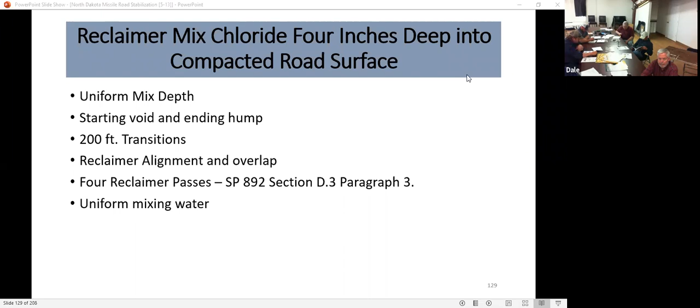Doesn't want to. Oh, I guess I got to click. There we go. There you go. I'm sorry. Can you hear me all right, Dale? Yep, loud and clear, looks okay.

Good, very good. Well, I appreciate the thoughts and comments there. And if there's something that I go over here that you question at all, or have any questions about, I'd really appreciate the question. I know I'm going through this pretty fast, but again, feel free to interrupt. That's where we really get down to the nitty gritty.

This next section is on reclaimer mixing 4 inches deep into the compacted road surface. If I failed to mention it, I'll mention it now: it's 4 inches compacted thickness, we don't specify loose thickness, it's compacted. So when we run a reclaimer through that, 4 inches fluffs up to maybe 5.5, perhaps 6, depending on moisture content. So what we're concerned about is uniform mixing depth.

I want to talk about the starting void and the ending hump, which may sound kind of weird, but I'm sure reclaimer operators can relate to this, and the 200-foot transitions in the specs. This reclaimer alignment and overlap, we already kind of talked about that with chloride spreading. And the number of reclaimer passes, we have to make 2 passes on each side of the road. The uniform mixing water is a critical issue here.

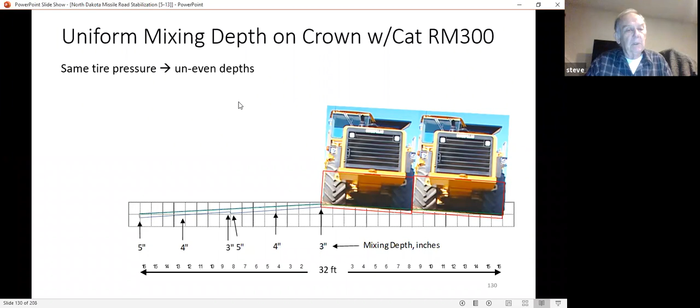I'm going to suggest one way: vary tire pressure. This lean is not very critical when you're going down, say 10 or 12 inches in a soil stabilization application. But where we're talking about going down 4 inches, it can amount to 1 to 2 inches, again depending on tire pressure. So one thing to do is definitely check your tire pressures to make sure they're uniform, and then you may want to consider adjusting the front tire pressure, and maybe doing this on a concrete floor.

The 3.5-inch blocks simulate the 4% crown, so you put blocks under the up-crown side to get the lean into the machine, and then you measure what the actual crown or slope is on the front bumper of these Cat reclaimers. It's pretty convenient to do that with a Cat machine, and you'll probably see that it's over 4%. So you need to adjust your tire pressure so that when you're on a 4% slope, the front bumper or frame is at 4.5%.

So anyway, this is just one way to try and counteract this issue with crown, grinding on a crown on thin lifts. What it means, though, is that every time you switch to the other lane, you have to turn your reclaimer around so that same wheel is on the up-crown side.

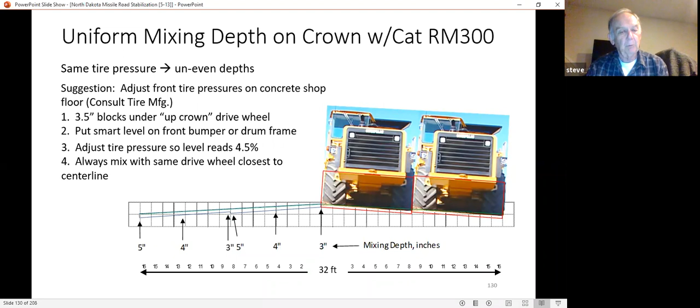When we look at the voids and the hump created during regular stabilization, where you're going down say 10 inches or something, when you lower your drum into the ground, you build up a pretty big berm in front of the drum, and material starts coming over the top of the drum before you move forward.

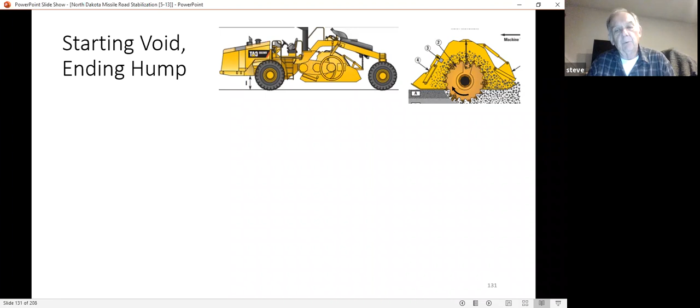When we do that with gravel, a 4-inch layer of gravel, the first thing you notice is that you're throwing rocks out the front of the machine unless your front door is closed, which I'd suggest closing just to retain material. As you start moving forward, you don't get a berm until you go down the road maybe 20 or 30 feet, and then after you get that accumulation of gravel in front of the drum, it starts coming over the top and falling behind the drum where it should be.

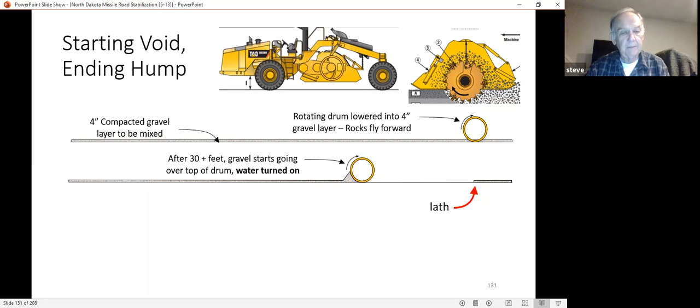Also, wherever you start, I suggest putting in a lath or some kind of mark—maybe a cone, a traffic cone, a candle could be another approach—to make sure you know where you started and stopped. After the blade gets out there and starts moving stuff around, it's kind of tough to tell sometimes. But you end up with this starting void, and when you get to the end of a run, you also have a hump.

Of course, when your forward motion stops, you shut your water off, you raise the drum out of the ground, and then you back up. Normally people will spread this berm out with their front door, going backwards. But you have this void at the beginning, and the beginning and ending here might be 1,000 feet away from each other, so it's not very practical to try and get that material back down to this point. I have a solution for that you might want to consider.

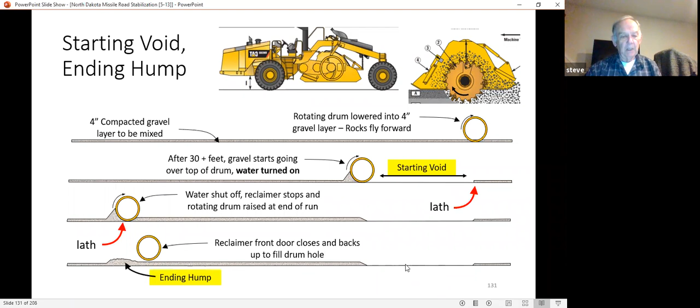So anyway, you might want to smooth this hump out, but that doesn't really solve the void problem down here. One way to deal with this, I'll try to illustrate in this schematic: we've spread chloride down this side, the first lane, and the chloride truck either turns around or covers the second lane. Then when we come along with our reclaimer, we have a void down in here, and he backs up and starts here again.

You could turn the reclaimer around here and go this way, and that way you'd have a void and a hump right next to each other, so the blade operator could have a chance to fix that void.

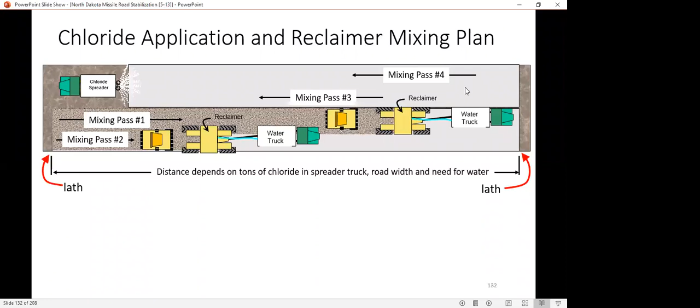However, another way to do that is, like in the diagram, the reclaimer starts on this side of the road, at this end, and they're going in the same direction. When you get on the other lane, you turn around and go that way, so we end up with a hump and a void problem opposite each other, so the blade operator can fill in the void with a hump. So that's one way to do it, I guess.

I show a roller behind this reclaimer for a good reason, and that roller, compacting that material, does a number of things. One of the things it does is start the curing process, the chloride curing process, because it mashes all that material together and gets that chloride to spread out better within the compacted mass, so to speak. It also gives the blade operator more of a solid platform to blade from, as opposed to trying to blade a bunch of loose material.

That one roller's compaction is lost later by the fact that we have to end up blading all this over again, reprocessing this material. But I think it is important to have it there to start the curing process.

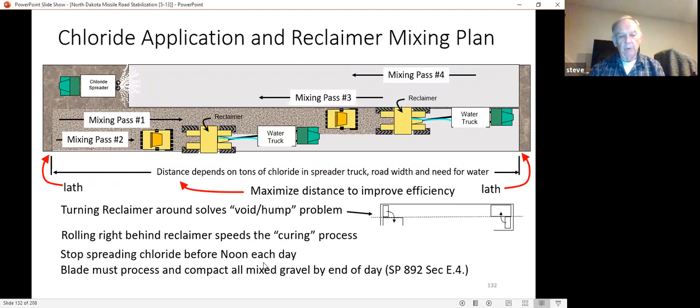One of the things that's important here, and Tom Oxford will be on top of this, is to stop spreading chloride too late in the day. There's a lot of work to do after spreading that chloride, so you may want to stagger your work team or whatever.

With respect to transitions at the beginning and ending of the treatment, the drawings show a 200-foot transition, which I understand what this is for, but I would suggest maybe making this 50 feet in the future.

There's a question as to how you're going to mill and blade this 200-foot section. You can't mill this thin out here. So what I suggest you do is take this material in the first 100 feet of this transition and basically move it ahead and start your milling here.

And this is where your lath would go in the ground, or your candle. Then after you get done in the final blading, you basically move all this mixed material back into this other 100 feet.

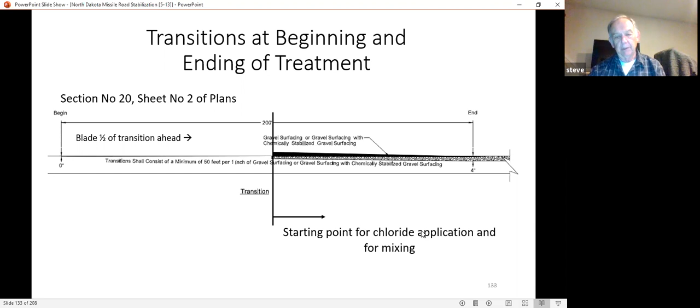So this is a starting point for your chloride application and for your mixing. Coming up with a chloride spread mix plan is kind of important based on how much chloride you have in each spreader truck and how much water you have in your water truck, and what application rate or how much water you think you're going to have to add during mixing.

The spreader truck or the water truck could limit that or be the controlling factor on how far you go. Based on 15 tons, 30 feet wide, with the spreader, you'd go 1,154 feet. With a water truck with 3,000 gallons, if you were adding 1% moisture, you'd go 1,800 feet. So in this case, your chloride spreader truck controls how far you go.

This shows the chloride that's been spread, the water truck that's being pushed by, in this case, a blade with a rotary mixer on the rotary drum on the front on the moldboard, and then followed by rollers. And of course, all this is going to be picked up again, but getting that compaction will speed up the process of curing.

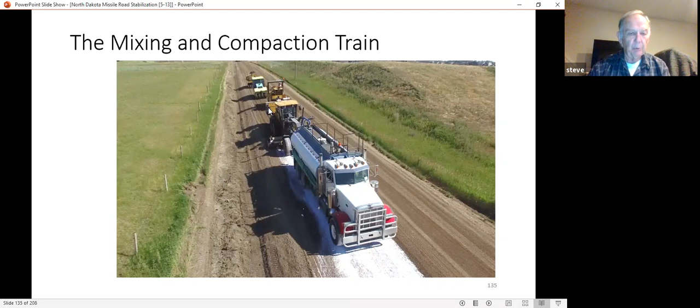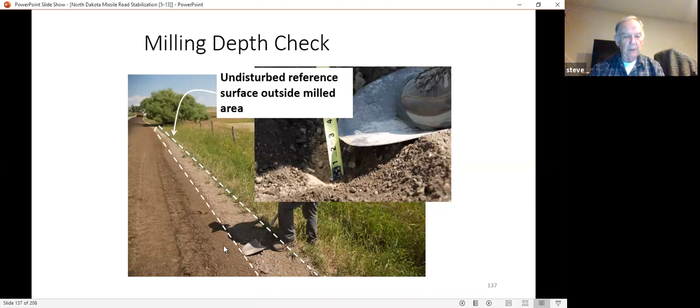With respect to milling depth checks, a good way to do that is at the edge along the shoulder, and assuming you have a pretty good shoulder out here, you basically remove any loose material right on the surface and then dig a hole and measure that depth. Here we're looking for 3 inches, and here again we're at 2 inches, and we have this 2-inch depth, and again here's our compacted depth that we're trying to determine whether or not we met that depth requirement.

Here we're looking at moisture content indicators. You can do this by picking the gravel up in your hand and squeezing it. You should see some moisture on your fingers and palm, and the cast that you make should stick together. If it falls apart, you're too low. If you're squeezing a lot of mud out on your fingers and the palm of your hand, you're too high.

You can also look at the tires on your reclaimer. It's a little tough to do on a Cat reclaimer for the operator to see them. This isn't a really good example - this tire should have more fines sticking to it. I think I have a better slide later where we look at the front tire on this type of machine, and it's clean with little material sticking to it.

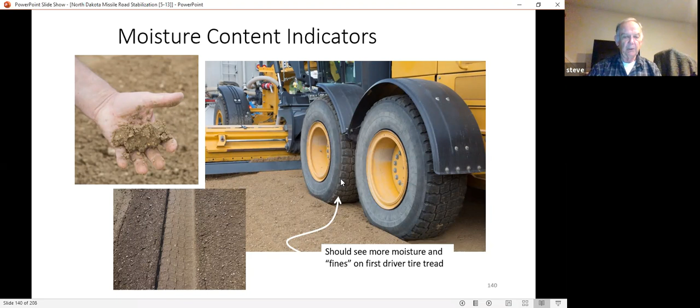We're adding water in the drum here, so we've got higher moisture content, and you can see that on the wheels. Here's a case where the reclaimer operator, starting out, needed to ramp up his water as he got into material. That's difficult to do - you can't just turn on the water and expect it to be uniform, because you've got different amounts of material coming over the top of the drum. So we got a wet spot here, a dry spot where he totally turned off his water, then another wet spot, and this blade is waiting because as soon as the reclaimer gets matched up with the first run, he's going to blade these wet spots out.

We've got quite a bit of material sticking to the reclaimer tires. The moisture content and the mix look very uniform. We do have some overlap, higher moisture content at centerline, and so the blade operator is going to have to solve that problem. Otherwise we'll have problems probably getting compaction here because it'll be too wet.

There's a good reason why in the specifications they call for being within 2% of the low side of optimum. So if our optimum moisture is 6%, we have to be within 4 and 6, and we don't want to go over 6. The reason for that is to eliminate or reduce the amount of blending we need to do with the blade, and hopefully meet compaction without exceeding optimum moisture.

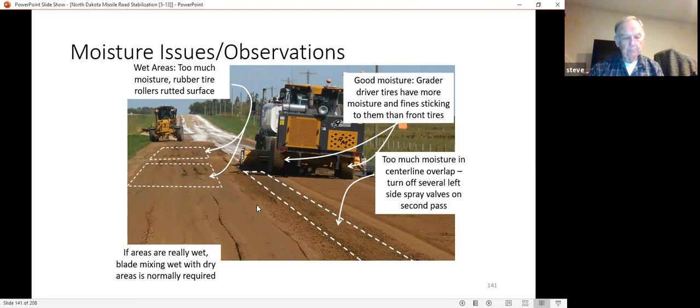Again, this estimating process where we dig or put our hand into the mixed material and squeeze it - this material's too dry, the clump is starting to fall apart. In this case, we're close to optimum moisture - there's no sheen on the aggregate, and the material sticks together. In this case, we're squeezing too much moisture out of the material, and we see an excess amount of fines and moisture on our palm and fingers.

Here's a better picture of the tire comparison, where your back tires show quite a bit of moisture on them, and your front tire doesn't. Seeing the back tires on a Cat reclaimer is pretty tough from the operator's compartment, so that's where a ground man comes in. That's pretty important - we already talked about this streaking and this problem.

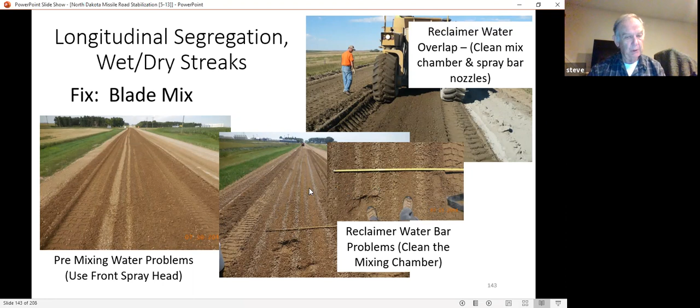You can also have segregation problems that exist because of moisture. So when you see these kinds of problems, you need to figure out what's going on. The only way - you can't rely on the reclaimer operator to see these. That's not realistic. There has to be somebody on the ground doing that.

With respect to the reclaimer operation, the alignment - he basically has to follow whatever spread of the chloride. His depth control is, of course, important, and you don't want to get into the subgrade. Hopefully we've got enough rock out there - sounds like we do. Moisture content is a big thing, and that will influence what happens during shaping and compaction. So that's very critical.

Now we'll talk about blade processing, the gravel and chloride. The objectives of this are to improve the chloride mixture and moisture content, make it uniform, and help speed up curing.

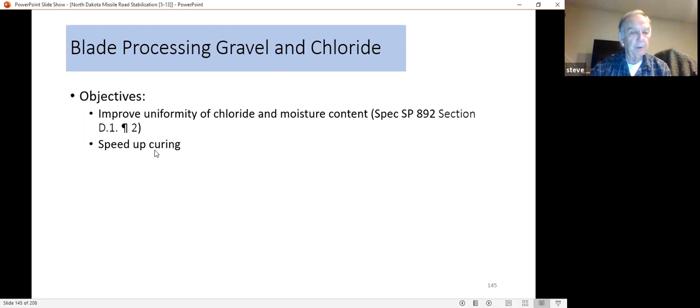One of the things is we have these pretty wide roads. Here I show one at 16 feet either side, so it's 32 feet wide, and we have a 14M with a 14-foot moldboard. You can stack material higher than 27 inches, but it takes up quite a bit of space. When you first move this material from this side to this side, part of it really hasn't been touched, so you need to make sure you get everything mixed - maybe by making a run down each side, then moving it all over to one side and spreading it. Various techniques for that, obviously. But we need to process full depth and width, and that's what it says in the specifications.

The higher the moisture content is, the more this is going to fluff, but the higher it'll stack too. So here are some of the concerns about doing this.

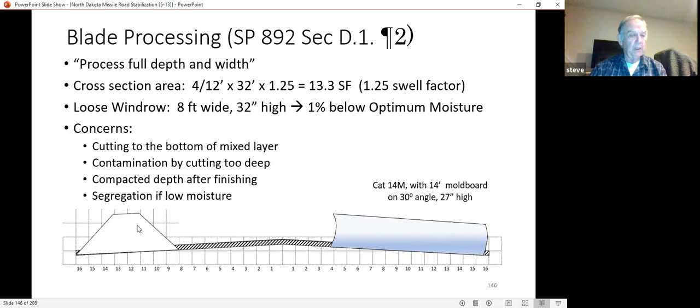But the segregation is key. If you can't get this to a uniform moisture content and gradation, you need to keep mixing, and that's important.

This is what the specifications talk about for cross slope. Again, we need a tolerance on this, and I would suggest making this 4 to 4.5%, and that'll give a little bit of leeway, because you don't really know how much that material is going to knock down after you build it at a certain percentage. So I'd suggest building it at 4.5%, and you'll just be over 4% after everything's cured out.

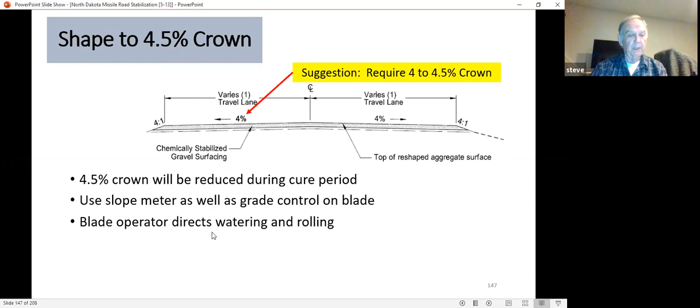Again, using a slope meter and a blade can be real helpful. The blade operator, of course, is one that directs watering and rolling. He's got to make it look right and come out right. These two operations are key to that, so he needs to control those.

Another thing that's important is if you have, like, a 1,000-foot run, and then another 1,000-foot run, you may want to wait until you get a couple 1,000-foot done so you can blade all this out and make it come together with the proper crown and compaction. The longer the run is, the easier it is for the blade operator to make this look good.

And then compaction with the rubber rollers. Of course, you roll from the low side of the shoulder to the center, and should have a consistent pattern, but it's not near as important with gravel as it is with pavement. The big thing with gravel is you can't over roll it, so more rolling is better. I wouldn't shut down rollers unless you had to for some good reason.

The other thing to keep in mind is that increased speed reduces compactive effort. Again, if you're in doubt of that, put a nuclear gauge out there and run some tests after running roller speeds at like 6 miles an hour, then do it at 4, and you'll find you get a lot better compaction out of 4 miles an hour.

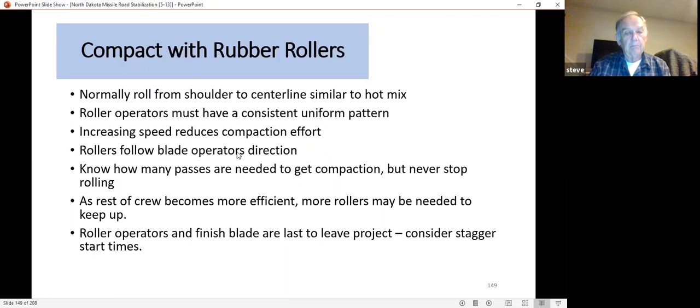The rollers follow the blade operator's direction, and never stop rolling. Again, this just shows rolling the shoulder, then the center line, and keeping these pretty close. Generally in specifications, they specify 3 to 5 miles an hour for compaction rolling.

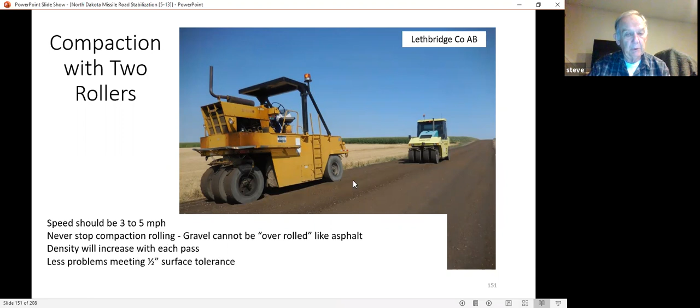This just shows a couple heavy rollers. You will get increases in density with each pass, and you'll also get increases with traffic after you open it to traffic. But the tighter you get this initially, the better chance you're going to have meeting the half-inch and 10-foot tolerance surface tolerance.

I want to talk about optimum moisture for a minute. Optimum moisture is the best moisture for compacting material, meaning it takes the least compactive effort to reach density. During the first roller pass, you may get 90% density. Second roller pass, I'm sure you get 95% with the chloride-treated gravel, depending on roller speed and all that, but normally that's the case.

As you do additional passes, you get less and less compaction, gaining less each time. If you were to roll below optimum, you may never achieve 95% compaction, and it depends on how far below optimum you are. At 2% below optimum, it's going to take quite a few passes to get there. So I suggest you get within 1% of optimum, but that's kind of a close call.

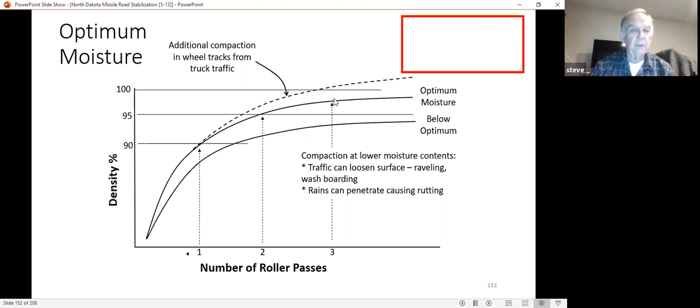What you also find is that after you get done compacting, you will get additional compaction from traffic, and how much depends on a lot of different variables. That additional traffic will not only compact what you did, but it'll also make your surface tolerance probably worse. So that's something you need to consider, just how long you're going to wait after you do this compaction before you accept the surface.

Gravel roads are not pavement. They're not going to stay in the same spot forever, and so there is that problem with acceptance of that surface tolerance.

This is one of the reasons why you want to try and exceed 100% density, and you can do that with heavy pneumatic rollers. That gives you a better chance of meeting the 1/2-inch surface tolerance and not having to worry about what traffic does to that surface.

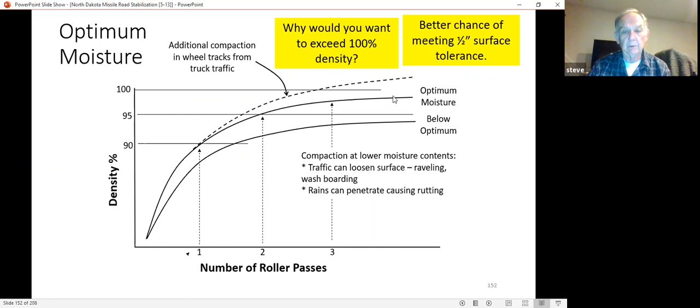Finish blading, you're just trying to get the roller marks out, and you need to carry enough material on your moldboard to do that, but I wouldn't get very aggressive at cutting into it, because you're basically reducing the density and having to come back and roll more material. The finish rolling is very easy to get that back, because you've got a good platform here that's been compacted well.

Transitions between runs: you have to get into the last 50 to 100 feet to make a decent transition. So you do have to go back into what you finished blading on the previous pass, and maybe using your articulation to help get that center line compacted well is good.

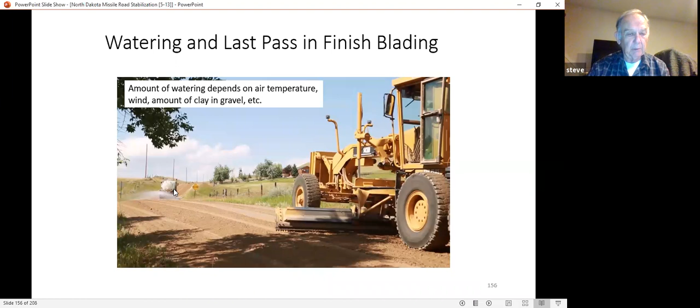Later, when you come back and do your finish blading, some of it might be dried back enough that you want to put some water down, and that can help you avoid segregation if you're using carbide pick blades, and also make that material compact well after your final passes. What you're looking for is the crown, and after your final compaction, you're also looking for percent compaction, 95% compaction.

I want to talk about building a road crust, which is not in the contract or the specifications, but it's a good way to try and reinforce the surface that you build with chlorides, at least with gravels that contain some clay. Now, the sandy aggregate we have in place, we're stabilizing.

You may not be able to do this, but I think it'd be worth a try. Most counties do this as a sort of traditional practice, at least where they have clay in their gravel. There are some benefits during construction: it reduces the amount of raveling or float you get off the finished surface after it's open to traffic, and it makes meeting this 1/2-inch in 10-foot surface tolerance easier. But again, the gravel should contain some clay.

It works best in hot weather because you get dry back pretty quick. What you're doing is basically a light watering on compacted gravel, so this light watering doesn't cause rutting in the gravel. It allows you to pump some fines for a road crust with rollers or water trucks or whatever, and the surface normally dries out and sets up overnight.

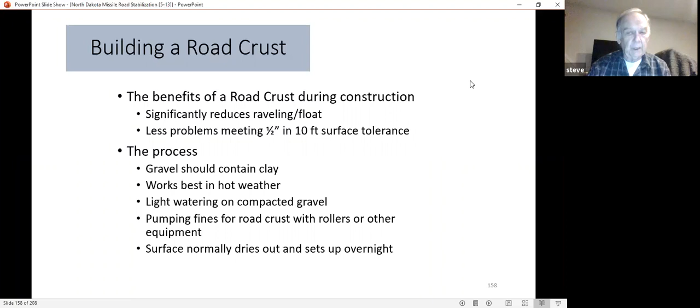This clay crust is kind of what we're talking about back when I went through this slide. I think that's an important part. It's one thing that's kind of difficult to specify in specifications, but I think it's quite doable in construction if you have some clay in your gravel.

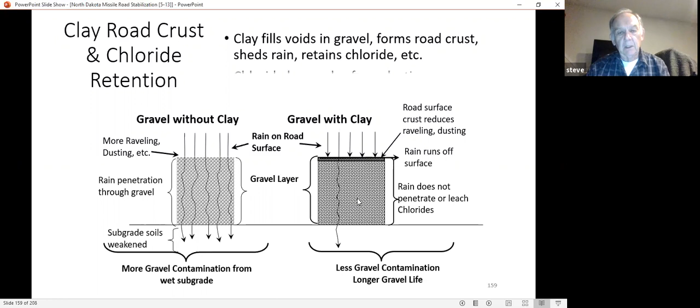10-mile-an-hour signs put out for traffic will reduce the amount of pickup on vehicles that you get, so that's something to remember. What we're trying to do here is just get maybe a 1/4 inch of this material on paste on the surface. Sometimes it's not even that thick, it just depends on the gravel you're working with and the moisture content.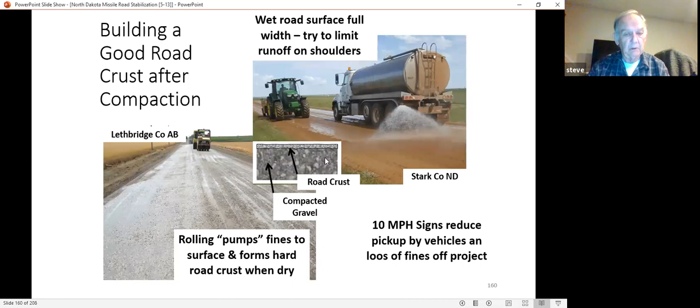Here we've got a little excess moisture coming off the road surface, and you do get these little sort of wheel marks. They're not depressions, but that all goes away by the next morning.

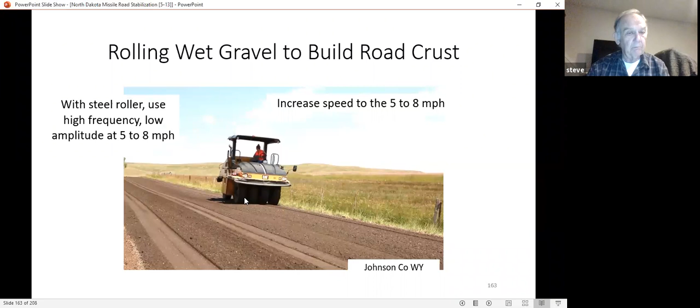Here we are putting down a light application of water, and we're doing the same thing with a self-propelled pneumatic. You want to use high frequency, low amplitude, and fairly fast speeds there. You can do this very easily with steel, with the vibration.

In this case, we have some segregation in our gravel. Just looking at the picture it's hard to tell, but when you get out there it's somewhat obvious. You say, well, I bet that part of the road's going to ravel, and sure enough that's what happens. Most of the water has gone down into this area because there's more coarse material there, and they had pretty bad segregation problems on this particular road.

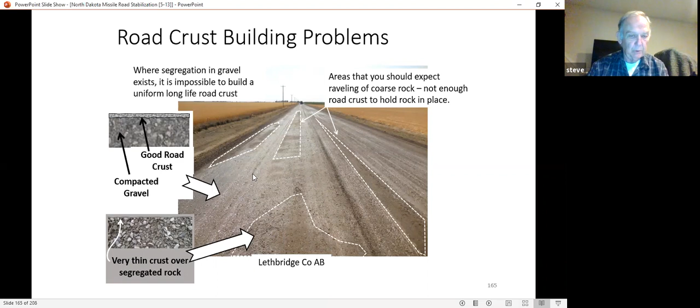Again, you're just looking for a thin road crust over the surface, and in this case we may not have enough to actually make a decent road crust. But in this area we pumped quite a bit of fines to the surface, and that picture I showed at the beginning is a road crust developed by those practices, so it holds up pretty well.

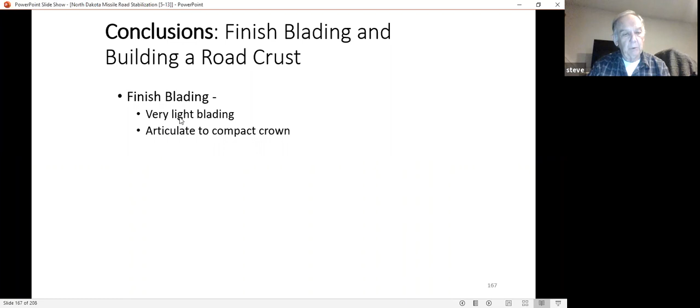Again, for finished blading, we do light blading and maybe articulate to compact. For building a road crust, it's light watering, and then the rubber roller at 5 to 8 miles an hour, or the steel vibratory too, is a real good approach.

You can also use the steel vibratory to try and iron out some of the ruts you might get, to meet the 1/2 inch and 10-foot surface tolerance. You can use this road crust practice with a vibratory roller to try and solve some of the problems you have with that surface tolerance.

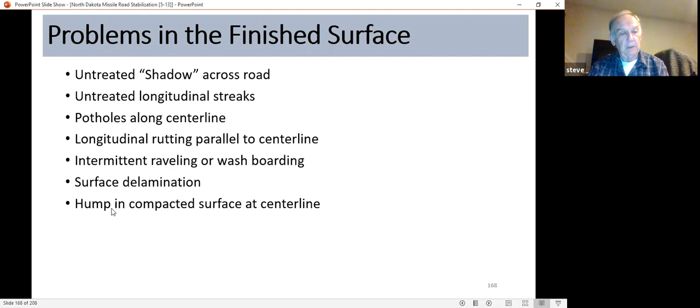Let's talk about problems in the finished surface briefly. One is a shadow across the road, longitudinal streaks, potholes along center line, longitudinal rutting, intermittent raveling, surface delamination, which we've already talked about, and a hump at center line.

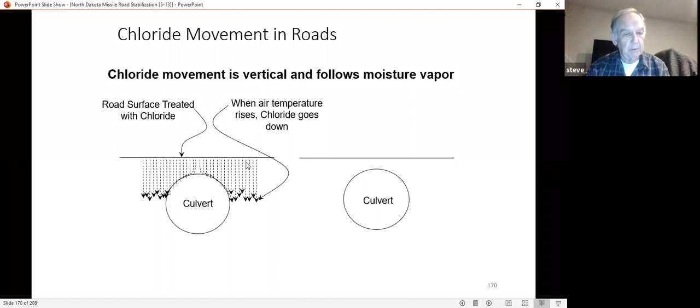The cause—I've listed some causes and fix options here. What's going on is that when you treat the road initially, you have your chloride treated layer up here, and when the air temperature rises, like in the afternoon, the chloride goes down, and in the evening it comes back up. The problem is it's not coming all the way back up, so what we end up with is an area over the culvert where the chloride has gone down, then comes up, then goes down, then comes up. So there's an area over the culvert that doesn't have any treatment.

It was treated initially, and there isn't any way for the contractor to really solve this type of problem. If you put more chloride in there, it's going to do the same thing over again. So there's no remedy that I know of to solve this, unless you have gravel with a higher clay content that reduces the amount of chloride up and down movement.

Untreated longitudinal streaks—I list some causes here, like uneven watering, inadequate blade processing after reclaimer mixing, or no overlap or skip between reclaimer runs. Most of the time, these kinds of problems are going to be solved by good blade processing after reclaimer mixing. So you don't want to skimp on doing that, because that could come back and cause you some problems.

Various types of changes maybe to improve the water truck, and maybe alignment berms or something.

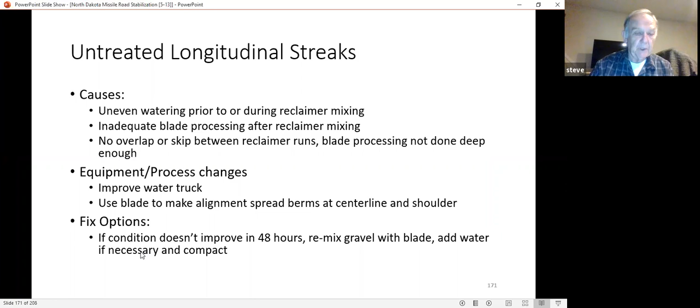If this doesn't improve after looking at it for 48 hours, and sometimes it can, then you need to remix the gravel, reblade, add water, and then recompact, which is intensive.

This is a hard problem to solve. If you end up with potholes, you're not going to have potholes right after construction, but down the road after you get some rains and so on, you may get potholes.

If you do have potholes like this, I'd encourage you to measure the crown that you actually have, because most of the time it'll be under 4%.

One of the causes of this can be the rollers actually during construction. They can flatten crown too, but most of the time it's truck traffic on that crown.

One of the approaches to help this is to go to a higher crown and monitor rolling operations, and maybe change your crown building practices and so on.

Longitudinal rutting can be caused by these benches in the different thicknesses in the treated layer. Pneumatic rollers kind of take care of a lot of this, but that underlying shelf often can come back and haunt you later. So you can get those ruts develop, and you have trouble meeting this half-inch and 10-foot surface tolerance.

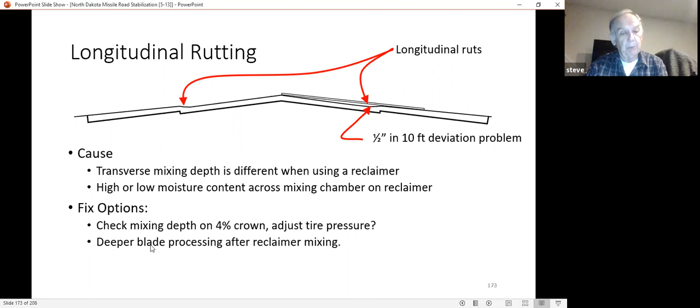We already talked about checking the mixing depth and adjusting tire pressure, and maybe our blade processing didn't go as deep as it should, perhaps.

If we have intermittent raveling or washboarding, that's almost always caused by segregation. Low gravel moisture content when it's placed will cause rock to separate. And if you allow traffic over it before it's compacted, even water truck application with an uneven spray pattern is another thing that can be a problem.

Increasing moisture in the gravel will help reduce segregation. That's the biggest, or the most convenient way to address segregation issues, and maybe better processing with the blade from one side to the other until segregation doesn't exist.

We already talked about this surface delamination issue here.

Sometimes we get a hump in the compacted gravel at center line, and that could be because our moisture content in our gravel is a bit too high, and during the curing process, it's moving too much. You can see this on curves a lot of times, whereas this would be the inside of the curve. This would be the outside, where the traffic is moving material in that direction.

We could have just too much material in one lane during finished blading, and that's why it's so difficult to finish blade one side of the road and then a day later come back and finish blade the other side. You want to try and wrap up both sides of the road and finish blading in the same day.

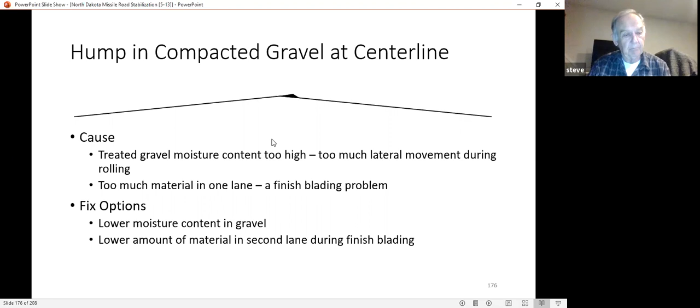So maybe some conclusions from this: thinking back the last couple hours, we talked about developing a work plan and being prepared to modify the plan, of course, and plan around the weather. I think we probably have enough material for 4.5% crown, but during the break, Mark was talking about maybe checking that out to be sure, which I think is a good idea.

If you have segregation issues, it's probably water, and deal with that early. I'd get close to optimum, but be aware that when you go over, you're going to have some problems. And I like to use a blade to mark center line and shoulder, but that's just my thing, I guess.

And cleaning out the reclaimer, check out the reclaimer and mix depth and so on. Reprocess mix depth uniformly, make sure there's a good job. That in itself will help you meet that surface tolerance and compaction.

And I'd say never stop rolling. You will see some sort of a crown reduction during curing. I'm not sure how much, but 0.5% is probably realistic. And the steel wheel can help you meet that surface tolerance.

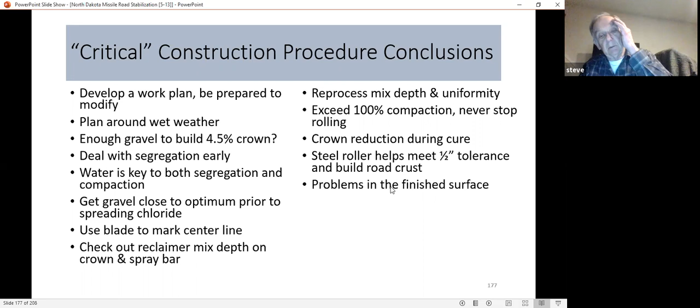And we talked about finishes in the road surface. So the last two modules will take maybe an hour, but I'm hoping a little bit less. But I guess it's time for a break. So I'll stop share here, I guess.

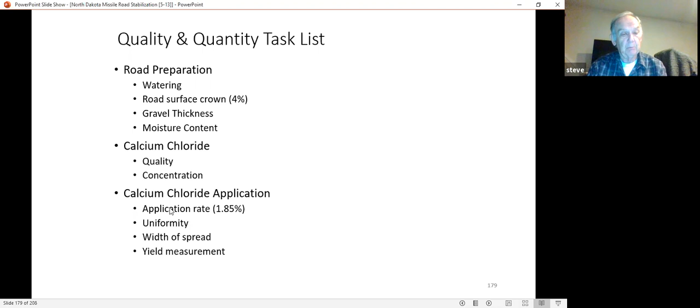I've never had any problems with it at all. The calcium chloride application rate with that 1.85%, we talked about these different processes. And with mixing, 3.5 to 4 inches. The width, of course, is kind of variable because the existing roads are variable. Getting a uniform gradation of moisture is very important, and the optimum moisture within 0 to 2% below optimum. Then compaction and shaping, we have that moisture content, percent compaction, the crown, and the surface tolerance.

So these are kind of all the tasks that are outlined in the specs in one way or another. With the calcium chloride, we called for a flake in the spec, and I'd suggest making some changes here. People have already started talking about this. When you look at this specification, the type S is a solid. These are different percentages of chloride, and the class A is a flake.

One of the things to point out, regardless of what you do here, is to indicate that the payment is based on 100% pure salt. A lot of agencies will end up putting that actually as part of the verbiage in the pay item. Some suggestions here on how to fix this situation are provided. Again, the acceptance for the chloride is by manufacturer certificate, and then visual inspection.

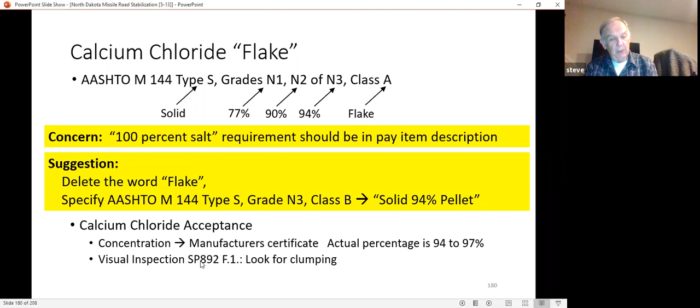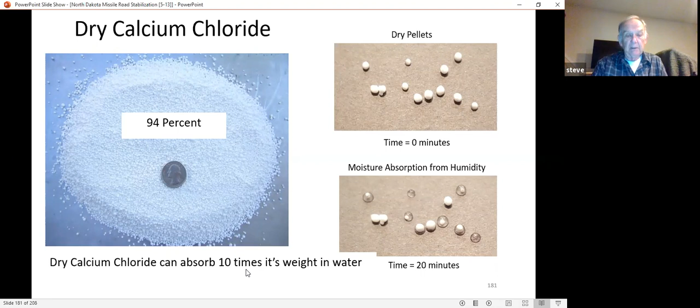If the material, if the pellet is clumping, you probably have a concentration problem because it's absorbing water and sticking together. So part of the tonnage in that sample contains more water than the 94% would indicate. Dry calcium chloride looks like this before it's exposed to moisture, and maybe 20 minutes later, depending on the amount of relative humidity, it pulls in moisture and becomes water droplets. It can absorb like 10 times its weight in water, so it's very moisture hungry, so to speak.

Laboratory compaction testing, and this is on the newly crushed aggregate. This modified moisture density test needs to be run both with and without 1.85% calcium chloride. The optimum moisture needs to be determined, and then we need to get within 95% of maximum, which is normally not a problem. For the in-place material, it's basically the same as this. So these two paragraphs are kind of the same.

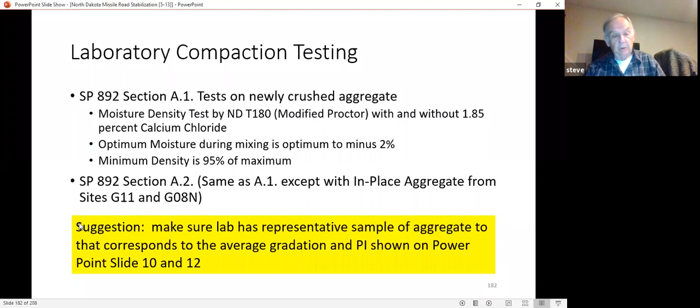The only concern I have here is to make sure that the sample these tests are run on is consistent with the gradation tests that have already been run, so you can assure yourself that's a good representative sample. Those gradations, if you go back to slide 10 and 12, it shows those gradations.

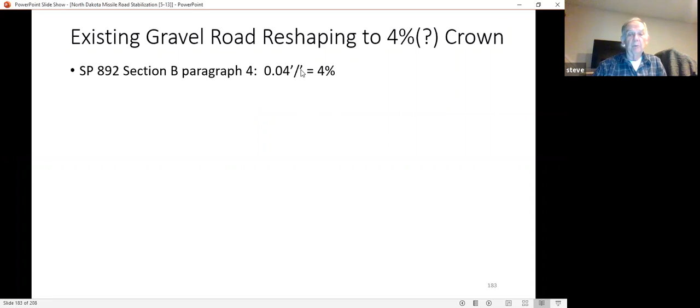Existing gravel shaping to 4%, maybe want to have a discussion on changing that. In the spec, it talks about 0.04 of a foot per foot, which is 4%. What I do for quality assurance and quality control is use a smart level and a 1 square inch, 10-foot long aluminum tube, that's 1 inch square. That works pretty well. One thing you don't want to do is put a lot of faith in the grade controls in John Deere or Cat machines, but that's just my take on the situation.

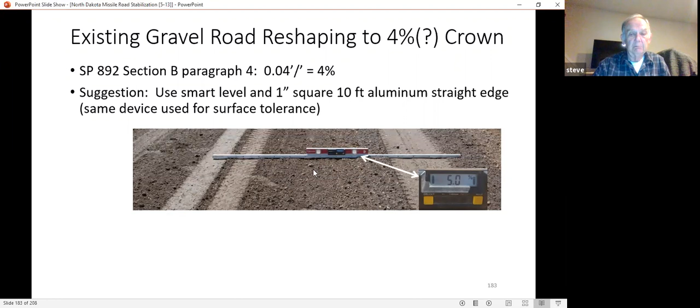Of course, you need to measure that after final compaction, and make sure of it. I'd measure it before final compaction too, to make sure you're close, and measure crown and gravel depth and shaping to make sure you're meeting specs.

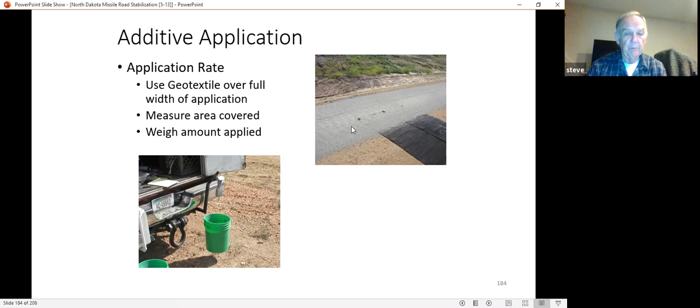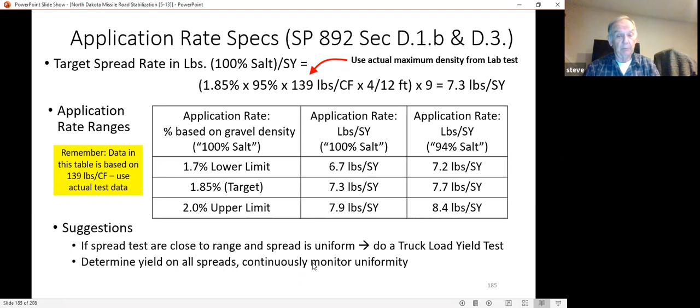Again, this is the heavy rate, and it looks uniform. You can drag a stick through it like you would for cement to see what kind of thickness you have out there. Sometimes it's tough when you get a lot of material on the ground to judge uniformity, so dragging a stick through it can help. It's much easier with top coat applications, which use about 1/4 or 1/5 the amount of chloride put down.

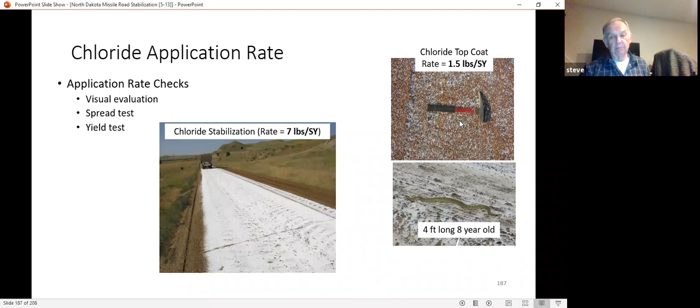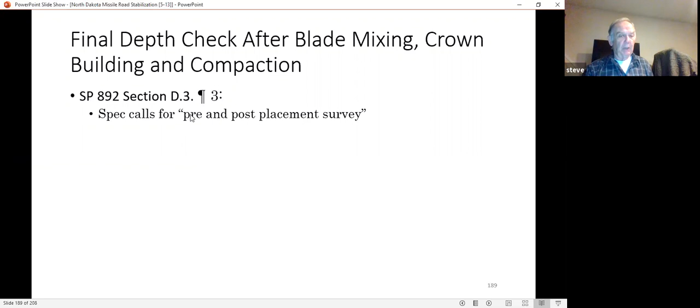The final depth check you can make after mixing, crown building, and compaction. Let me back up here. What the spec calls for is a pre and post placement survey. This can be done, but I've never found it to be very convenient—it's time consuming, and the accuracy of it is another issue. It should be accurate, but I'd maybe steer toward doing some other type of test where you can get much greater coverage. Doing this very often is very inconvenient and time consuming.

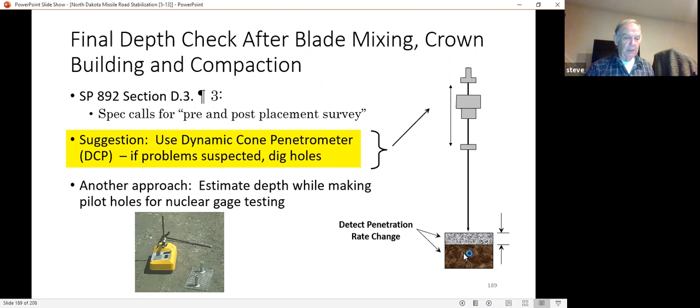You can use a dynamic cone penetrometer, which is just a drop hammer type of test, and you can normally detect where you run into the underlying material by the rate of penetration after each drop. Another way is just when you're doing the nuclear gauge and pounding the probe through the material—you can normally tell where you're running into that underlying material by how hard it is to pound the probe into the ground.

Some things to think about: will water drain down crown or down the road? How large is the problem? Do you think the problem is going to get worse or better? Maybe you want to come back in 7 days and remeasure it, or you may want to put off making the decision until 15 days later. You can go back out there and recompact that with water and heavy vibratory rolling.

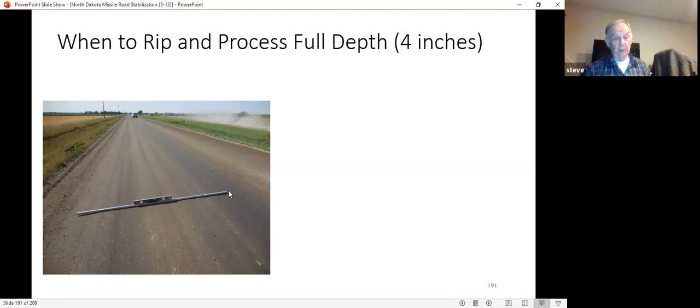This is obviously a real tight surface, but there's a 1/2 inch here that's a problem, and a 1/2 inch over here. From a practical sense, I'd say this 1/2 inch on the shoulder is not a big problem. This one over here, I'm not sure it's much of a problem either, because it looks so tight. I'd hate to tear this up just because it's not meeting that 1/2 inch surface tolerance. But I'm speaking from a standpoint where I don't have any contract authority here or anything else, so take this with a grain of salt.

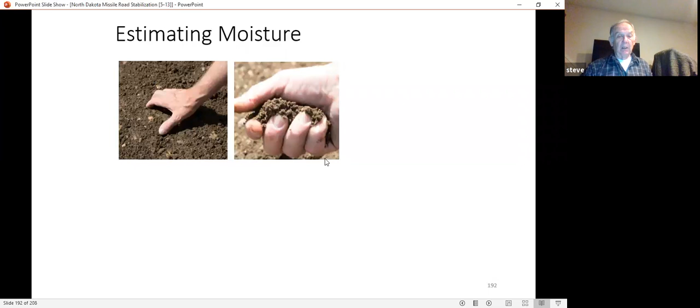Checking for crown after finished blading, and I would check crown before finished blading too, to make sure that your finished blading is right on track.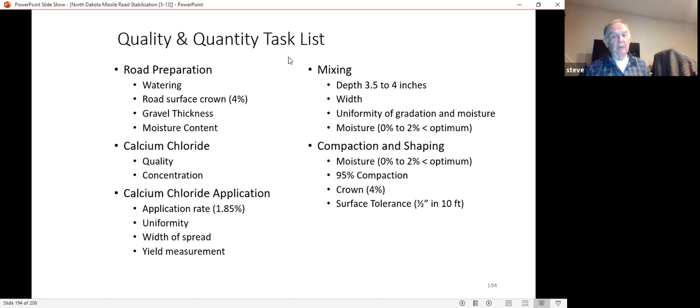Okay, so that's important. I wanted to go into Module 6, maintenance of chloride stabilized gravel. There's quite a few bullets here to cover, but we've already talked about a lot of this, so I'd like to refer people back to Module 4 in the construction procedure for these topics, and focus on blading frequency, the maintenance blading of stabilized gravel, the practices for that, and talk just briefly about chloride surface applications, which may be something to consider as a remedy for not achieving the life that you expect or hope for.

I also like to thank the many county blade operators that have contributed to this. I've done presentations like this for a long time, and most of what I have to share with you comes from those knowledgeable people that have been out there 8 to 10 hours a day thinking about this sort of thing. So there's many thanks to those folks.

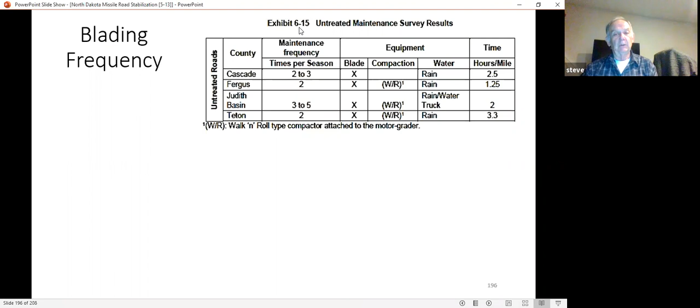One of the things in the report that Lee wrote is essentially in these exhibits, and I'm not going to get into these too significantly. I took this information and put it into a sort of simplified table.

With respect to maintenance blading of the stabilized gravel, one of the rules is don't break the road crust unless you have issues like traffic speed dropping considerably, a lot of potholes, a lot of defects—then you need to be thinking about blading. And like was mentioned earlier, the best time to do this is in the spring.

That's because you have some intermittent rains over a period of time that gradually raise the moisture content in that surface. That is almost impossible to do in the summertime with a water truck, so that timing is really important. Everybody's blading in the spring, but for these stabilized roads, that's about one of the few opportunities you have to really do it effectively, and hopefully get the road crust back after you do that.

Sometimes your potholes and loose rock are a safety hazard—that's another reason to get out there. And sometimes people will, not necessarily in the missile road area, but in counties that have done this, add chloride in the spring, in areas that might need it.

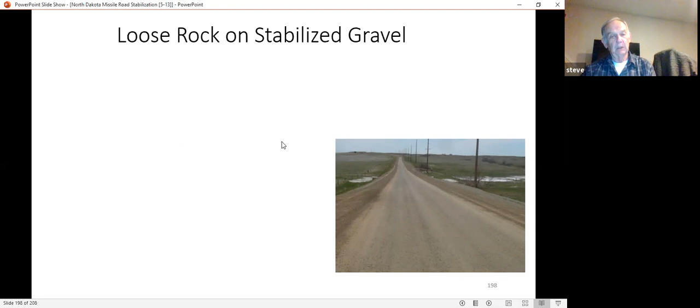So there are lots of causes of loose rock. Sometimes if you're crushing over 3/4 inch size rock, you'll get a lot more ravel out of it. If you got a poor gradation, low clay content, and if your gravel is dry or segregated during initial placement, like that one photo that didn't meet the 1/2 inch and 10-foot surface tolerance, you're going to have a lot more loose rock out there. The blade guy with the county can't fix all of this. This is what was built into the road surface that the blade guy has to cope with.

Again, looking at the need for blading, it's usually not necessary until spring. Some counties have not even bladed in the spring for a couple of years. Don't break this loose, this road crust, and incorporate loose rock. Oftentimes I think it'd be better off for this loose rock to be plowed off the road completely, so it wouldn't bother the blade operator so much. But that's just my comment.

Spring for sure for blading, maybe fall if road conditions are favorable. This is kind of a decision, something you need to maybe think about. You might want to blade maybe a section of road and see if that saves you some blading in the spring. Most of the time I think it will.

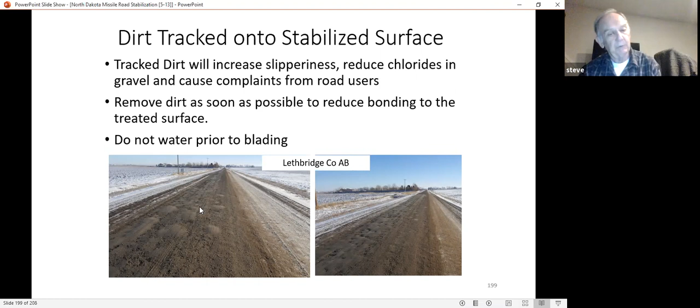But in ag areas we end up with a lot of dirt sometimes tracked on the road, especially during beet harvest in the fall, or sometimes when the fields are wet, they end up tracking a lot of material onto the road surface. This actually should be removed as soon as it gets on there. One reason is that if you don't remove it, it's going to be a sloppy mess once it gets wet. Also the chloride in your gravel will migrate up into that, so getting rid of it as soon as possible is a good idea. I'm talking about the day after it gets tracked on there.

Now with dusting, you might want to top treat roads that are previously treated. What I'm talking about here is like a liquid mag treatment on it. Whether or not you do that depends on whether you've got significant residual chloride in the gravel. In the spring, you need to make this assessment, and a lot of counties will do this before they order their chloride. They'll try and figure out how much chloride they actually need to use.

If this top coat on your treated roads looks wetter in the morning than in the afternoon, the reason it looks wet in the morning is because you have chloride in that surface. So maybe in that case you don't want to add any chloride. Also, if you have a really good road crust in place, maybe you don't want to disturb that and add any more chloride to it.

You might want to ask yourself about the weather conditions through the summer months. Most people don't know what that's going to be, but that's kind of what affects how long your chloride's going to last, along with the amount and type of traffic. Normally, your heavy traffic routes are the ones you're going to want more chloride in and maybe retreat more often.

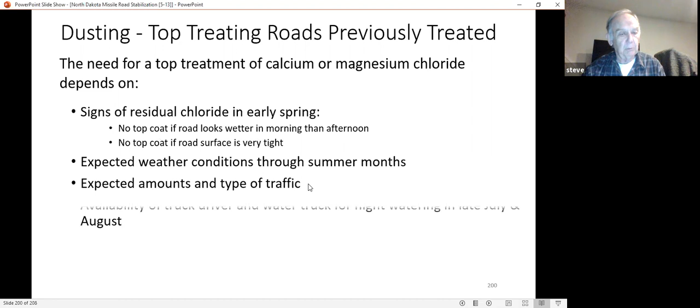And maybe the availability of a truck driver and water truck for nighttime watering in late July and early August. That can make a huge difference. And the value of the gravel versus the cost of the top treatment. Gravel's pretty expensive. Top treatments aren't cheap either, but the gravel is quite costly. And then again, your potential for unbearable public relations events is another factor, I guess.

Some retreatment options you might have: in place, mix more chloride with a blade. This is pretty significant. You can do top treatment with calcium or mag chloride. You can do the whole road, or just problem areas. You can add clay to your gravel, to the whole road or just problem areas. The clay is probably a pretty good investment because that's going to be there for quite some time if you chloride treat, and that'll improve your chloride retention.

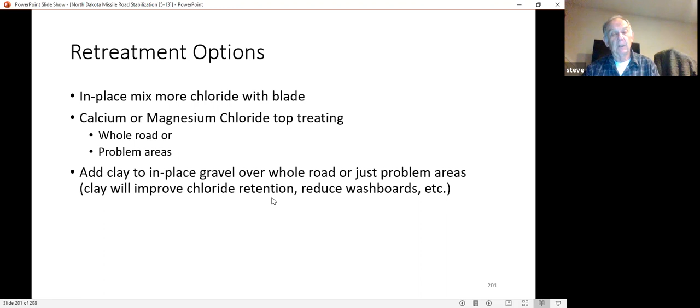Try extending chloride performance, like this 1,500 gallon a mile watering at night. And you maybe evaluate whether or not this is buying you much by treating a short area and not treating another short area.

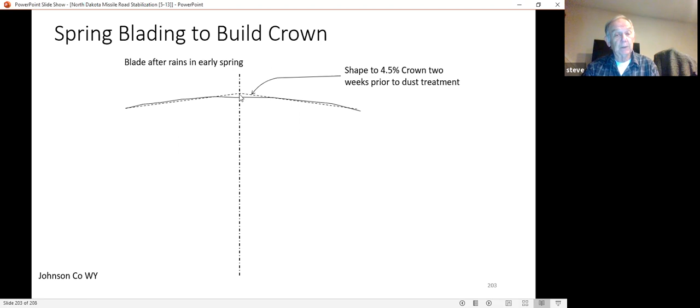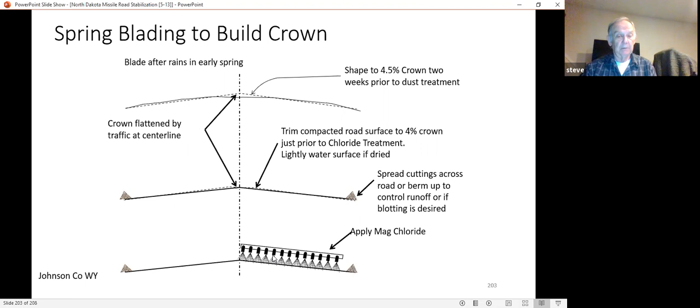Another practice for chloride treatments is to overlap them at center line where they get a lot of traffic. If you watch trucks go down the road, a lot of times they're going to be on that crown or a little over it.

You can add clay to gravel by a number of different means. And of course, the areas to do that in are where you have the PI and the 200 is, that some of those is less than 20, like in the in-place stabilization roads we're going to do. And if your stabilized gravel starts dusting by early August, you probably need some clay in there to retain that chloride.

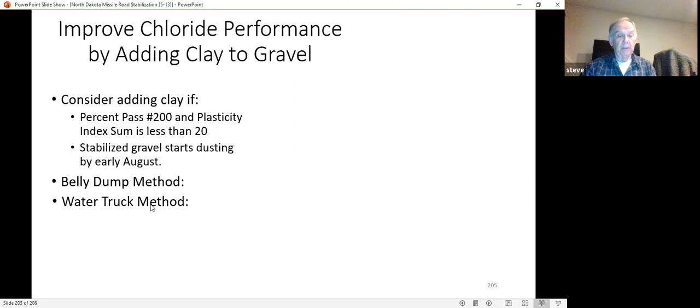There's a belly dump method and a water truck method that I put together, sort of one-page guides, and I'm more than willing to share these. That's why I wrote them. So we have a guide here for the belly dump method and another guide for the water truck method.

So anyway, the last part of this, module 7, is on the conclusions, and I'll briefly go through those.

I'm sorry, Dale, I noticed this stop share thing come up. Is that when we have a question? Are you there, Dale? I'm trying to find what happened. I don't know. Okay, I did. Go ahead, you certainly can try sharing again, or we can just talk through it. Okay, you want me to finish up? Should I finish up? Yes, please. Okay, I'm sorry, all right.

Okay, so we'll go through module 7 here on conclusions. This morning we started talking about expected performance, and I indicated that these two sites here where we have existing gravel, we will have raveling and washboarding, but with our chloride in there, we should see a decrease in the amount of raveling and washboarding. The way you can evaluate that is just to look at the gravel on either side of this particular stabilized segment and see if the washboards show up earlier in the untreated area, okay? Not very scientific, but it'll show that basically the chloride treatment will always show some advantages or some benefits.

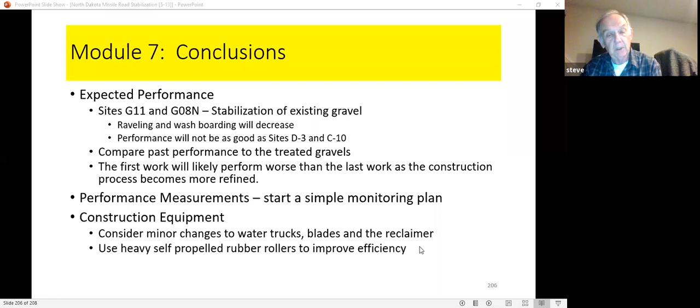Again, on performance measurements, I'd strongly encourage people to adopt some sort of monitoring plan. It doesn't have to be very complicated or time consuming. On construction equipment, making some minor changes to water trucks and blades, maybe tire pressures for your reclaimer, or spray bar nozzles, might be something to take a look at. I'd also strongly suggest looking at heavy self-propelled rubber rollers to improve efficiency—that's not to say you can't do it with towed pneumatic rollers, but just a suggestion.

On construction procedure, the moisture content is extremely critical. Building a 4.5% crown, or maybe going even higher, might be something to think about, with the idea that you're going to see a reduction in that crown over time. You may want to think about when you accept crown too. Specifications always like to put acceptance on the final result after everything's done, but in this case I'm not sure how realistic that is, since we don't know how much the crown will actually decrease over time. Might be something to consider in the acceptance part of this contract.

The blade processing of the mixed gravel and chloride is really important, and the moisture content in that is of course really critical. Again, with rolling, nonstop is a very good idea to keep in mind, and that'll help you meet that half-inch in ten-foot surface tolerance.

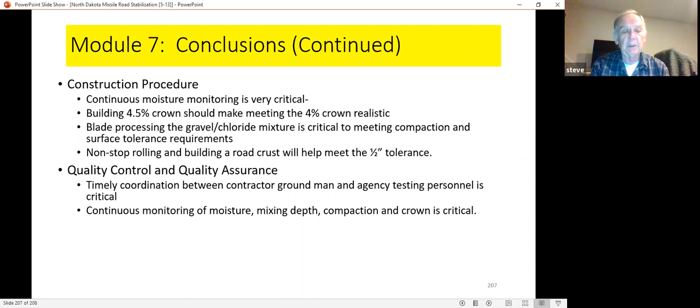On quality control, I can't overemphasize the timely coordination between the contractor and agency people—that's absolutely essential. Building a relationship between those two is part of this process, and I think that's working side by side. There's no substitute for that, for building that relationship. Again, continually monitoring moisture, mixing depths, compaction, and crown is very critical.

In the maintenance part of it, the maintenance of anything can either make or break what happens, and I don't know all the answers here. Maybe coordinating with Fergus County might be something to think about, to share notes with those folks. They have quite a bit of traffic on their gravel roads, and I think a very good maintenance crew.

But the key to maintenance, of course, is to not blade unless the defects get to be severe, and spring and perhaps fall blading is good, knowing when to do that. Rebuilding that road crust is really important—that's why blading in the spring is so beneficial.